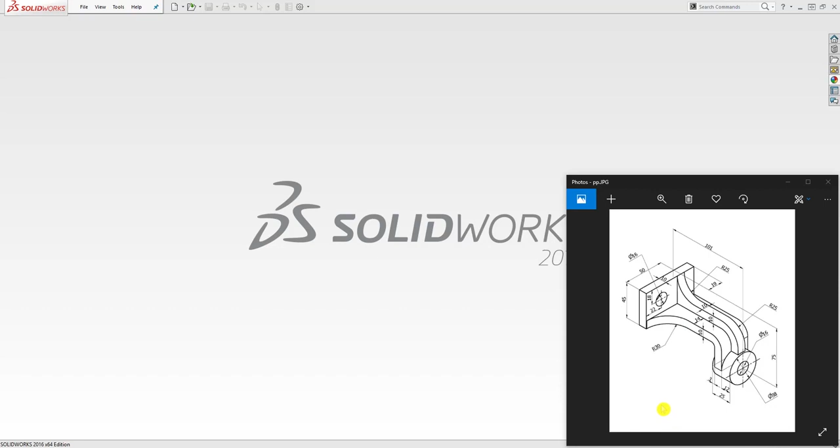To start a new part file, I don't have a template for metric, so I'll just start with inch and use that as an opportunity to change our unit. This is another way to learn how to change your unit. Go into your options and document properties, units, and change it to millimeter because this drawing is in millimeter, then click OK.

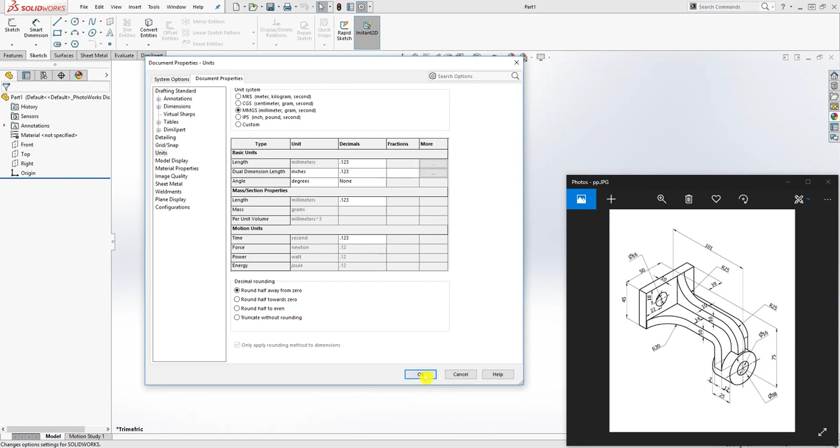The first thing we are going to start with is this cylinder, and we're going to draw everything back. To start, I'll click on sketch, and looking at how this cylinder is faced, we know we're going to be drawing it on the right plane. So click the right plane, and I'm just going to draw a circle in here.

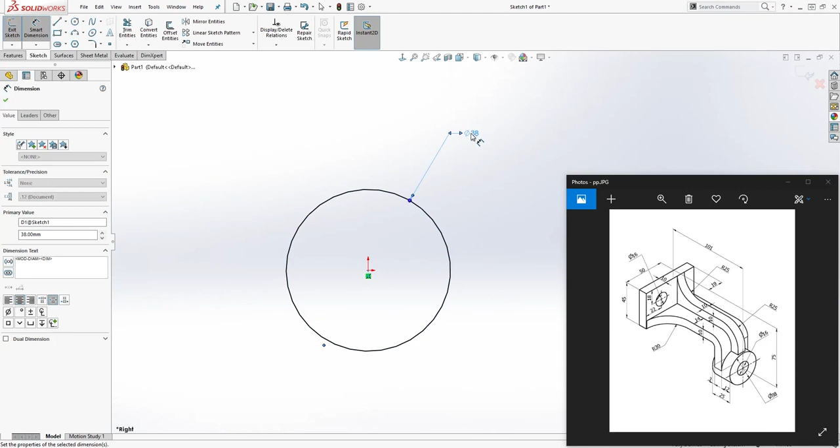I'll add my dimension, and it is going to be 38 diameter, then feature extrude. I'll extrude it in the other direction because it's going to the back, and the distance is 25, so I'm going to make that 25 and click OK.

So we have that. The next thing we're going to draw is this base on the back, because we need that as a reference to draw this groove thingy over here. So what we need to do is click on reference geometry, another opportunity to learn how to create planes.

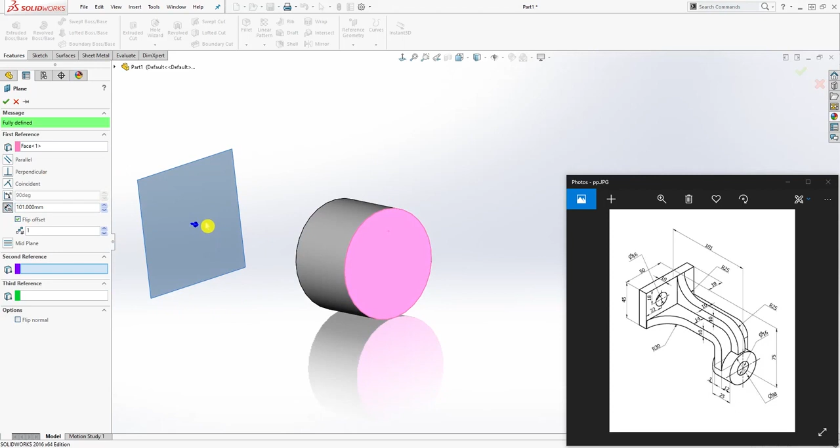We'll click on plane, and if we look at the dimension, it says from this face, the front face, to this face is 101. So that's what we are going to do. We'll click on this face, reverse the direction of that plane, and it is going to be 101 going back. So 101 over there, and click OK.

Now we are going to click that plane, select it, and go into your sketch tab and start a sketch. I'm just going to go normal to it, and we are going to draw a 4-corner rectangle right here. So we're just going to draw something like this for now.

We know the height is 45, and we know the total dimension for this length is actually 69, because if you look from here to here is 50 and the rest is 19. So we can just make it that way and just make it 69.

So we have that dimension, but we still need to constrain it. They also give you that from this length to there is 50. So how we can make that is click on this point and put that point on this line, so the point is free to move around. Then we select from here to that point and add the dimension 50.

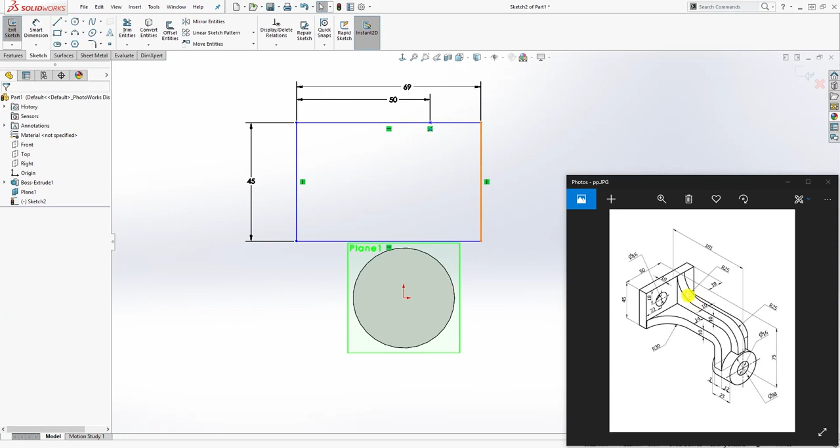We also know that point is actually on the center line of this circle. So what we're going to do now is click that point, holding the control key down, click your origin point on this cylinder, and add a vertical relation to it. So now we have that constraint.

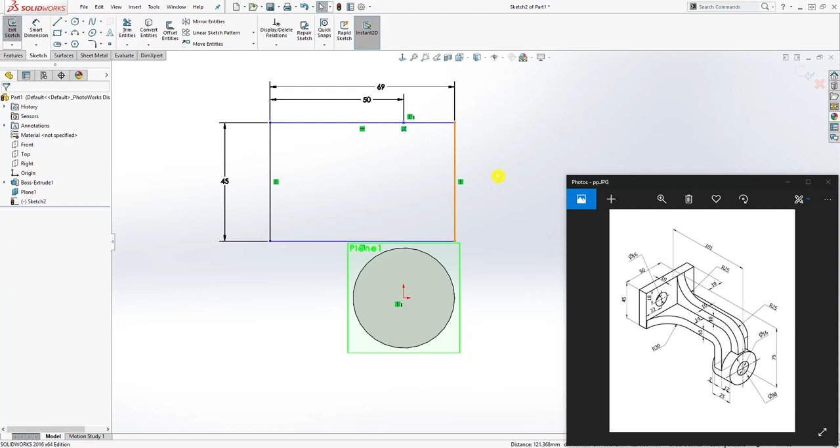Another one that we need is we know there's a dimension from the center to the top. So from the center to the top is going to be 75, and you can see that right here, 75. Send that to the top. So our sketch is fully defined because it's all black.

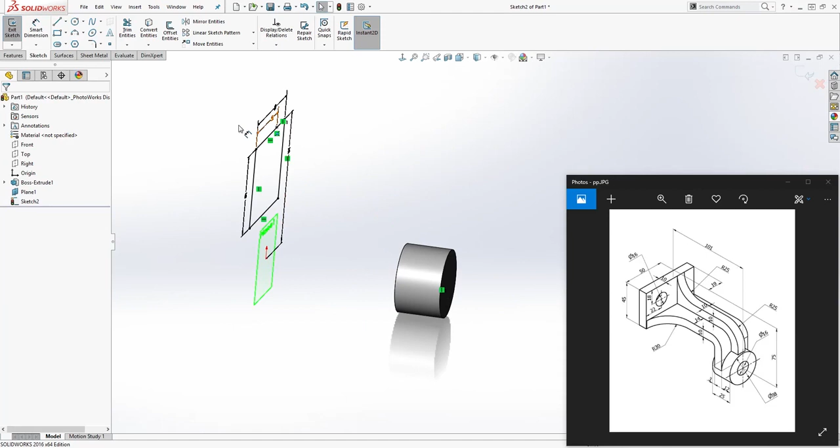Then we're going to go to feature, extrude, and we are going to extrude it in the other direction, and the distance is going to be 10, and click OK.

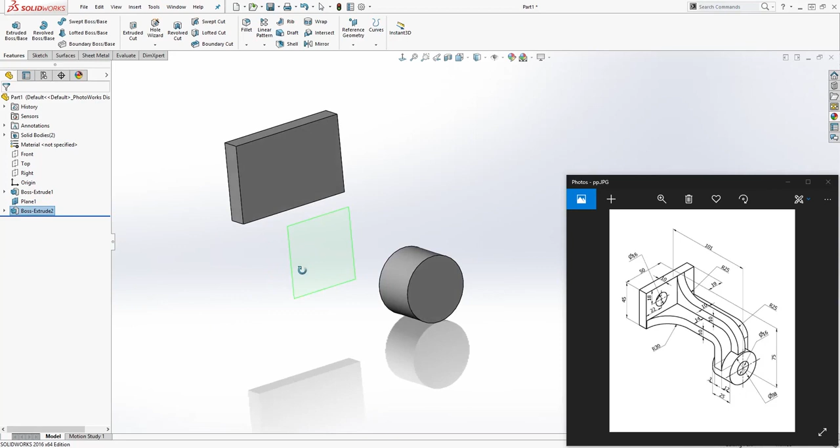So now we have this moving on. I'm just going to hide this plane because I don't need it, so I can click on it, right click, and select the eyeball to hide it.

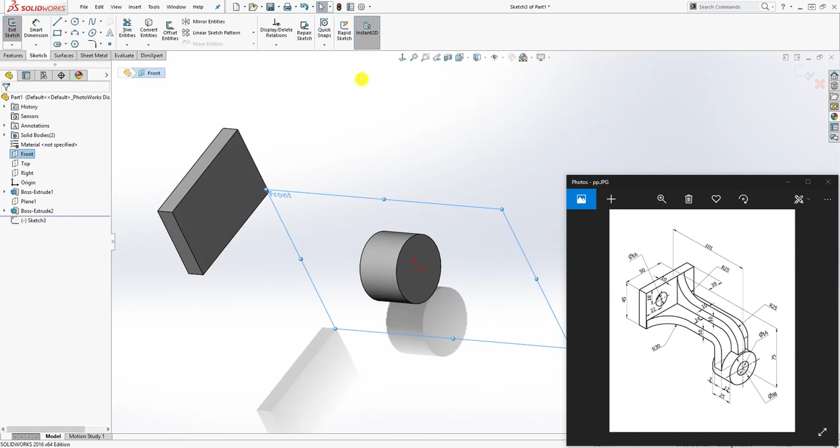The next thing we want to do is draw this feature over here. Where we are going to draw that feature is on the front plane, the plane going center to this cylinder. So click on that plane and sketch, normal to, and I'm just going to bring it over here. We want to draw a line coming here down and coming down. We know the distance from the edge to that line is 3, so from here to here is 3.

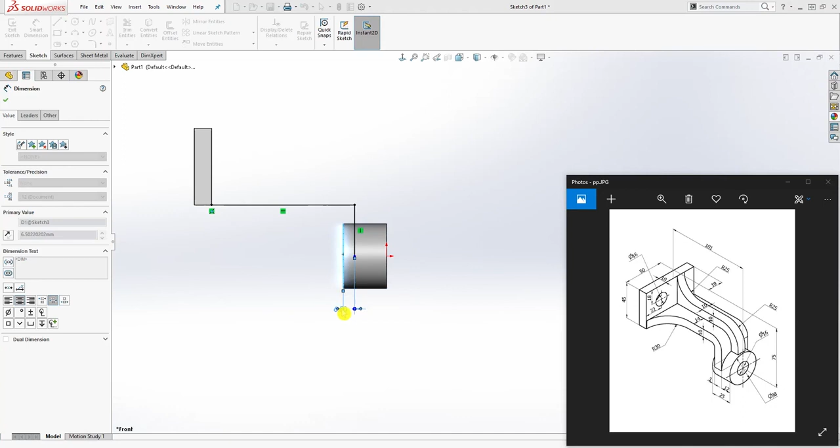We are just going to click this point and that origin point and add a vertical relation. To do that, click that point, holding down the control key, select that, just like how you select anything in Windows. So we have that.

The only thing we need to do now is add our radius, but the radius over here isn't given. They give you a radius up here which is 25. Since this radius up here is 25, the radius down here wouldn't be 25. The distance from that top face to the next level is 10, so you subtract 10 from the 25, which means the radius at this point is going to be 15. The next level is 10, so you subtract 10 from that 15, which means the radius at this lower bottom is going to be 5.

Everything is going to make sense once we're done. So select your radius, change it to 5, your fillet, and change this to 5. Add a fillet 5 over here and click OK.

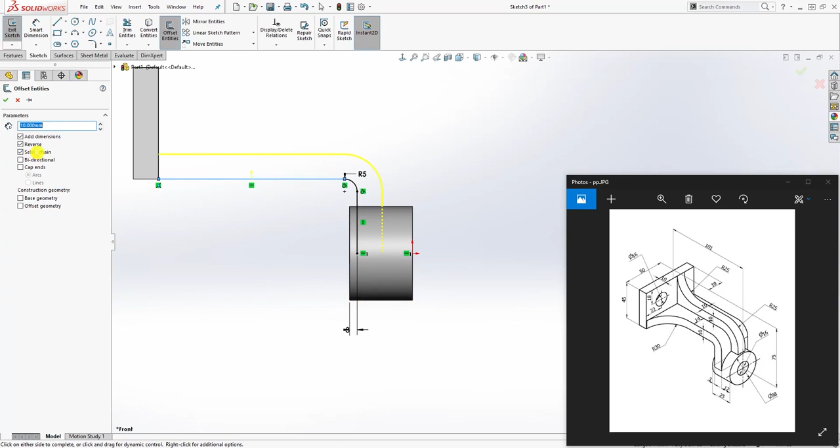Now watch this. Once we have that lower bottom established, we can now click offset. We offset this line. Make sure the first thing we want to do is reverse it in that direction, and make sure you have select chain selected, because if I don't select that, it's just going to offset just the line that I click. But if I have select chain, it's going to offset everything, which is what we want in this feature. So we have that selected and click OK.

Now watch, if I just try to check the dimension of this radius, you see it's 15, and that's what I mean. When we do the next one, you will see that's going to be 25.

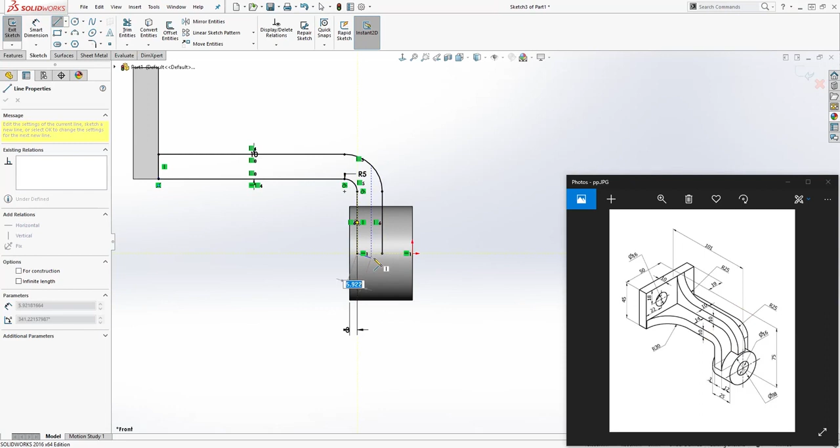So what we're going to do is just close off this sketch and close it off over here. Once we have that, I think I have an extra sketch over there. I'm just going to delete it because that's probably going to start giving me a problem.

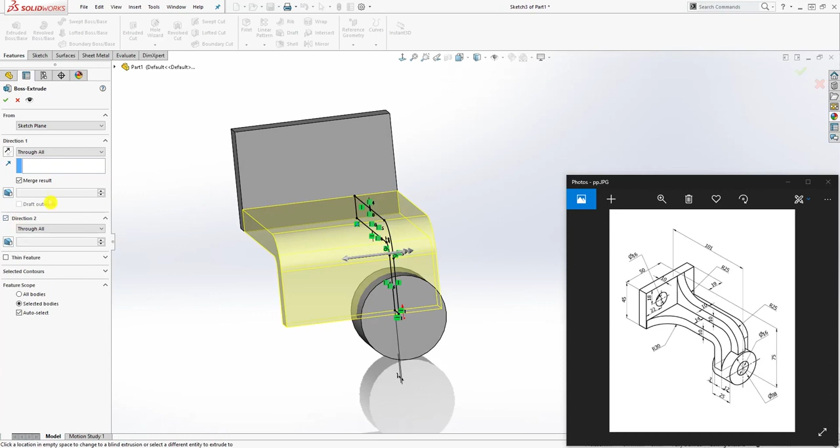We're going to go to feature, extrude, and for the first one we want to extrude it through all, and we're going to do direction 2, also through all. So we have something like that, or let me see if there's a better option. Yes, through all is better. Once we have that, click OK. Good, so we have that.

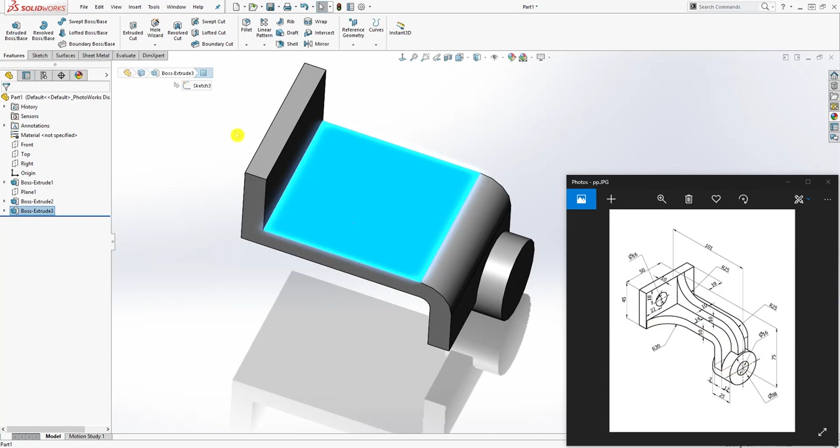The next thing we want to do is click on this top face. We're going to cut this part out now. Click on this top face and sketch. We're going to go normal to, and all we want to do is just draw a line from here, this point coming up, something like that.

Now we draw a 3-point arc. Click on your 3-point arc, click on this edge and click on this line, and just click the 3rd time to draw your arc. What we are going to do is click this arc, holding down the control key, click this line, add a tangent relation, click this arc, and select this edge line over here again, add a tangent relation. So that sketch is fully defined, and we are just going to use the trim tool.

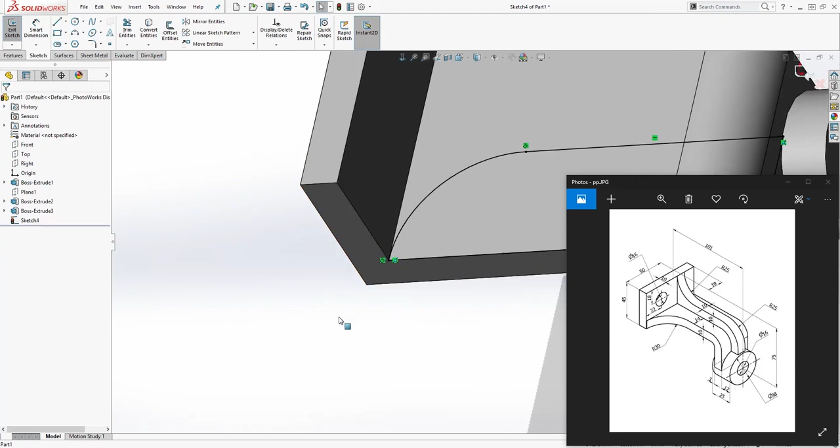I'm using trim to closest and trim this part out. So you just need something like that. Make sure tangent to this line, tangent to that line. And I'm just going to close off my sketch again. Make sure this is a horizontal line, so you should have something like this. Again, I have an extra line over there, I'm going to delete it. So yes, you should have something like this.

Then what we want to do is feature, extrude cut, and this time we are going to select up to next, because we want to trim everything on that side off, and click OK. Good, so we have that feature.

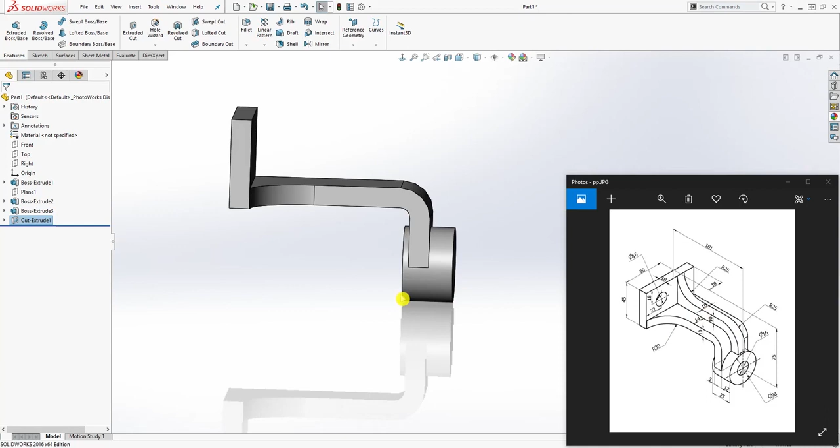The next thing we need to do now is draw this rib. So again, we click on the front plane and select sketch, number 2. Another feature we can learn now is, before you even do that, you don't have to hold it down. Select convert entity, select this line, select that line, select this edge, and select that line, and click OK.

So I have those edges converted. The next thing I'm going to do now is select offset, and I'm going to offset that. The distance is 10. I have my select chain selected, but that's okay, so we just leave that for now and click OK. Once I have that offset, watch if I check this dimension, you see it is 25, just as what is given over here.

For now, the only thing we need to do is draw this angle over here. So what we're going to do is... and I need to verify something. I don't think I added the... I think I made a mistake somewhere, so I'm gonna go back. But before I do that, let's just make this.

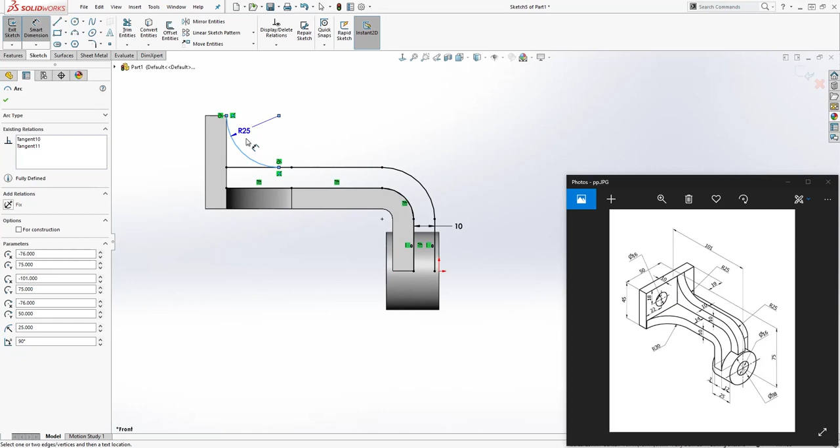That's what, no, we are not making it tangent. That's the same mistake I made with the previous one. So it is tangent, so the radius is 25. I was thinking it wasn't, but I guess making it tangent does make it 25. In this case I happen to be right, because if we didn't make it tangent, I can delete the tangent and try to add the dimension, but it turns out the dimension is 25. So I'll leave that as driven, and I'll increase the units just to make sure it's 25. It is 25, so I'll leave it.

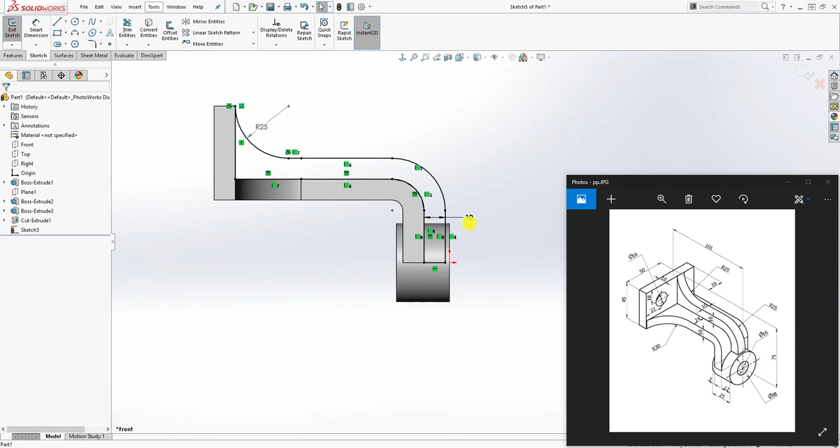So what we need to do now is trim this part out and bring this down, and I'm going to close the sketch over here. I have an extra line, delete that, and I have a closed sketch. So I'm going to go to feature, extrude, and we are going to extrude it by the mid plane, and the distance is going to be 10, and click OK.

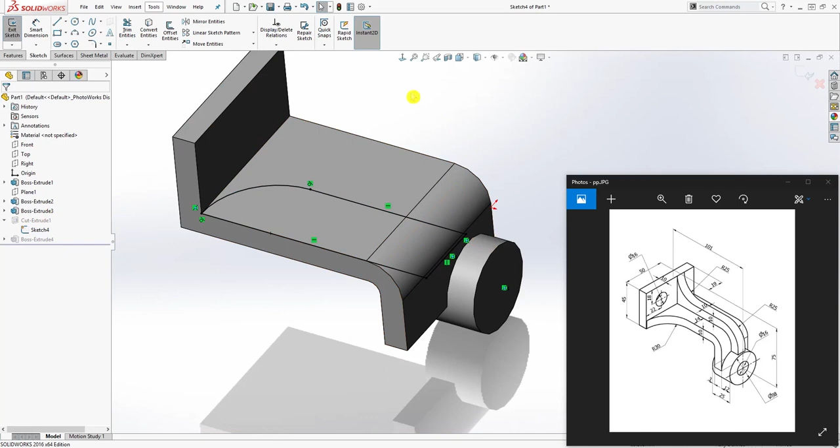Just to verify that I did this radius right, I'm going to go back to that feature. Click on this drop down - this is what I like about SolidWorks, because sometimes you make mistakes and you can go back and fix it. In this case, I didn't verify that making those two tangent makes this 30, so I need to verify that. So I'm going to click on the drop down and edit sketch over here, and let me check the dimension for this, and it is not 30.

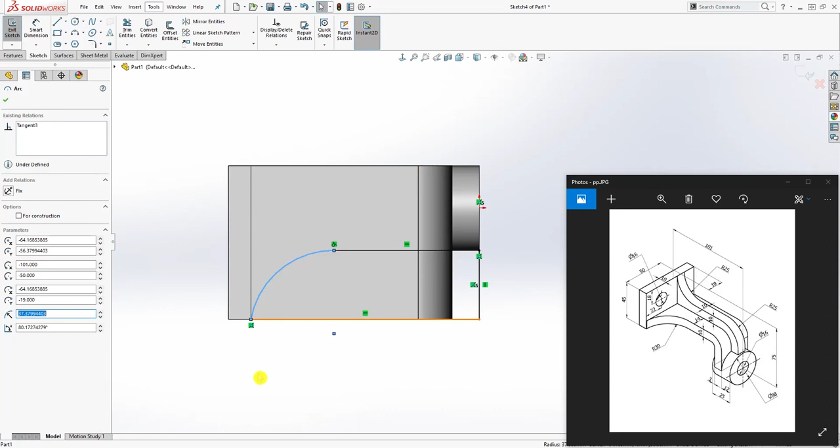So what I need to do is delete my tangent over here, because I don't need that. Now once I delete that tangent, my circle is tangent to this line, we want that, but it's not tangent to this edge. So delete the tangent relation to this edge, and we are going to fully constrain it by adding the dimension, which is 30. That is what you should have - this 30. Once I do that, I can just exit out of it, and everything updates, and I still have that.

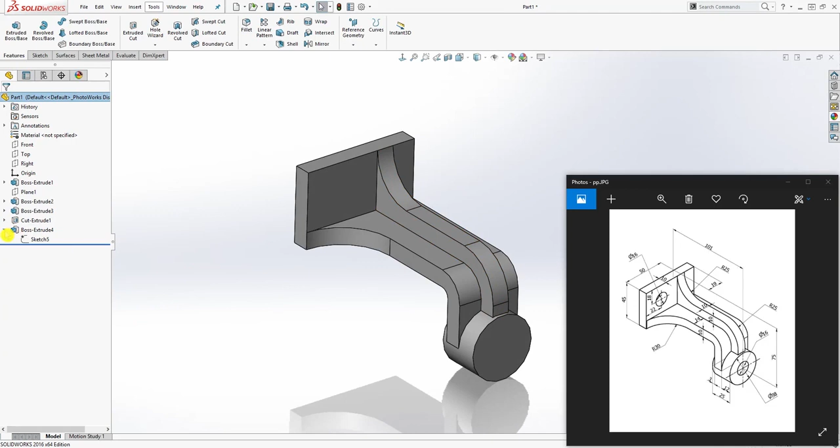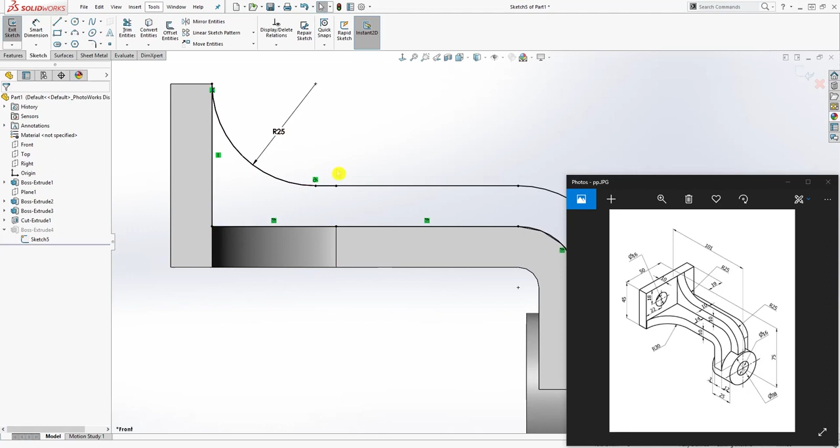I think we should do that for this one. So again, click on the drop down for that one, edit sketch. I will delete my tangent relation over here, and since the dimension is given, I will control it with the dimension. So here just add my 25. It's still the same, but for the other one it wasn't the same, so 25 and exit out. So good, we're pretty much almost done.

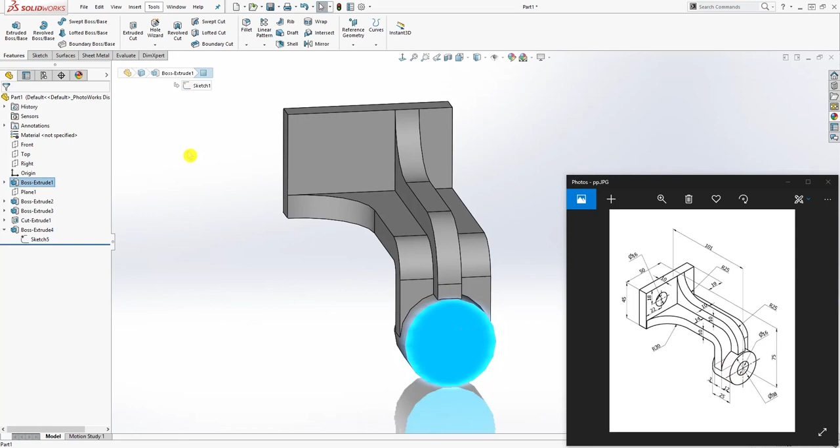I am taking longer because I want to explain this thoroughly, just for those who are not advanced in SolidWorks. So the next thing we need to do is just cut our hole. Select this face, sketch number 2, and I will draw a circle here at the origin point. Draw a circle and make that 38. It is not 38, 16. And we are going to go to feature, extrude cut, up to next, and click OK.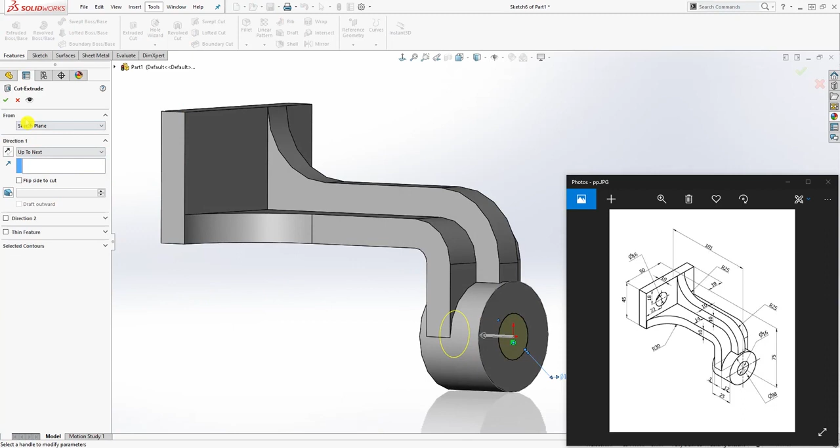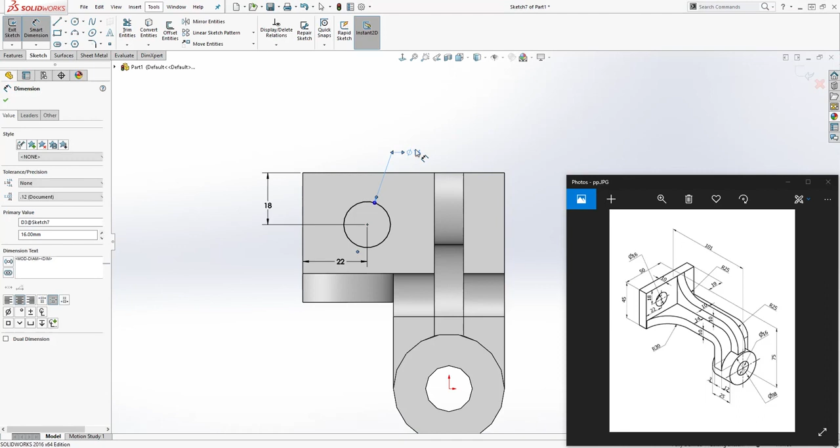We're going to do the same thing up here. Select this face, sketch number 2, draw a circle, and from here to here is going to be 18, and from here to here it's going to be 22. We're going to add our diameter to the circle, it's going to be 16. And we have a fully defined sketch, feature, extrude cut. We select up to next, so we're cutting it to the back, and click OK.

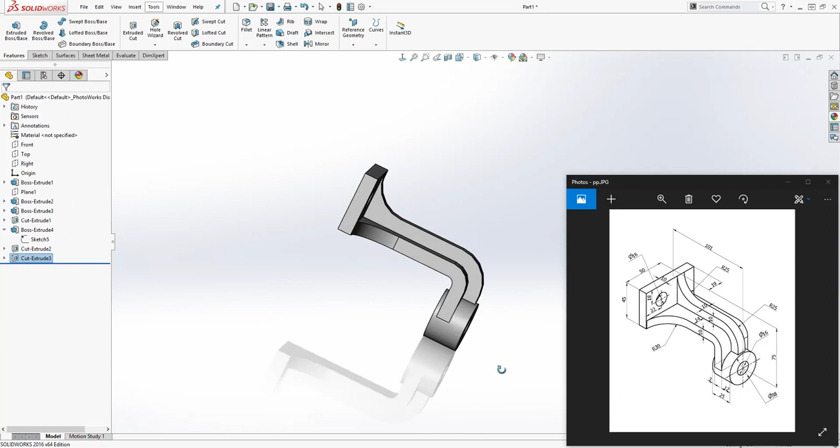And there you go, we have this part. Very easy part, complicated part, but the only part you have to figure out is this rib. But I hope everything, I was able to explain it thoroughly and slow enough for those who are beginners.